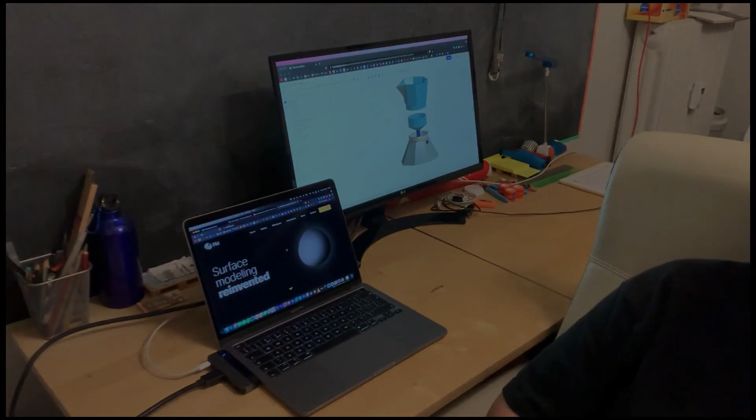To make the stovetop coffee maker, I started by designing its base. First, I designed the simple shape, and then I added, using the helix feature, the screw part which connects with the part I'll show you next.

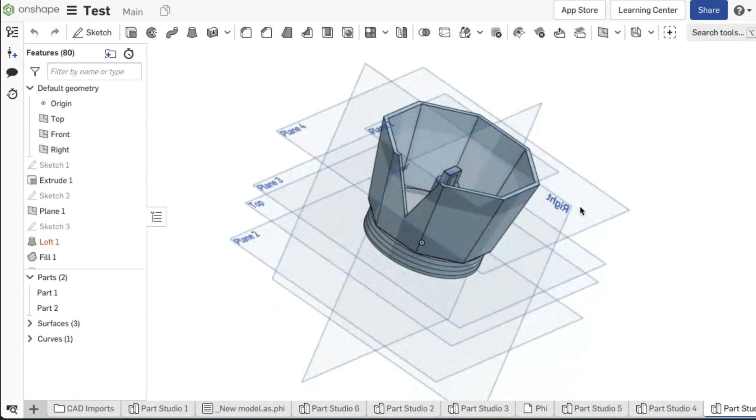This is the middle part of the coffee maker, which connects with the lower part using the helix tool again, but this time engraving it.

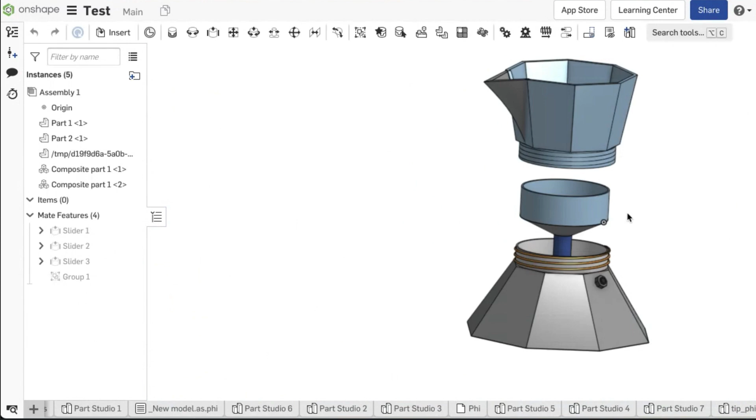Then I designed the part that goes in the lower part, which acts as a filter, for which I used the circular pattern tool to make all of these holes. And lastly, I assembled all of the parts together.

The next part is the tip of the stovetop coffee maker, which I designed using the Phi software. As you can see here, the curve where the two faces meet. And the handle was also designed with Phi, as you will see later. We designed the spout and the handle on Phi and everything else on Onshape.

To create the spout, we have already designed the rest of the top container on Onshape, so we now import it into Phi as reference. Then we select the faces where the spout should stand and convert them to Phi faces.

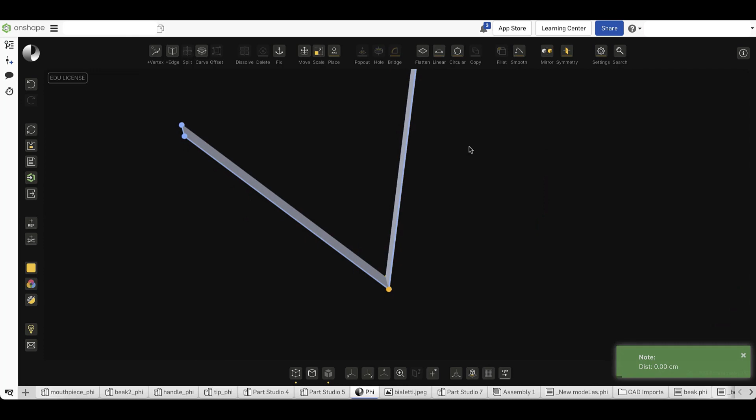After we hide the reference, we stitch the faces at their common edge to merge them into a single zero thickness part. We pop out both faces to give a thickness, and then we select this middle edge and pull it upwards and outwards to give the spout its basic shape.

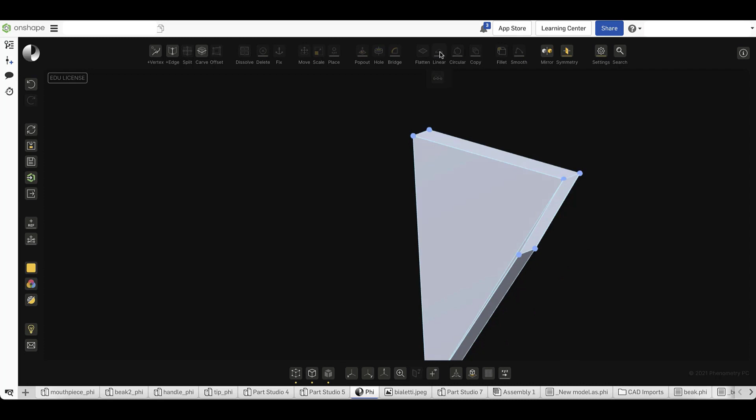We delete these unnecessary elements and make everything straight. We then curve the front edges for the coffee to flow nicely. Note that the hidden edge mode is being used now.

And then to curve the top, we add 4 vertices and pull them upwards. This is roughly the shape we want. So we check it on the reference model and we send it to Onshape.

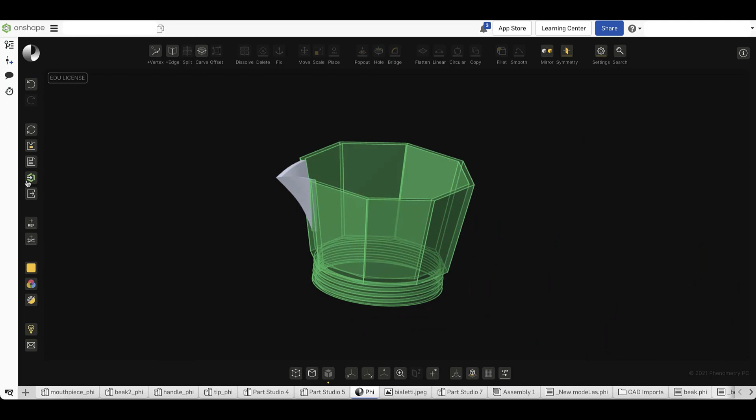It's going to appear in a new Part Studio tab like this. But since it's in fact a piece of the container, we bring them together in the same Part Studio and use a Boolean union operation to make them a single body.

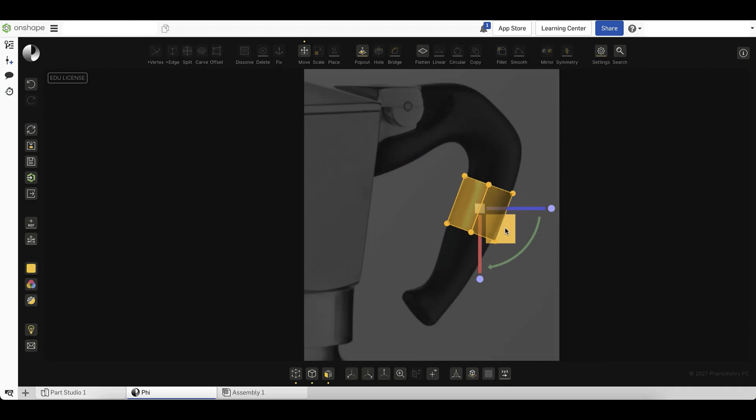Now, in order to design the handle, we start with a cylinder which we gradually lengthen and shape. At this stage, we are actually using the pop-out command over and over, and we manipulate the new faces created so that the shape is roughly defined.

Then we adjust the edges in detail and smoothen them. Smoothening is often combined with fixing. You can tell an element is fixed from its gray color.

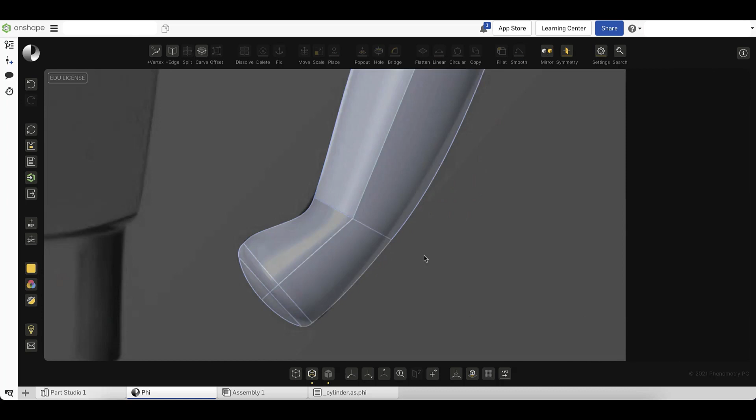As you see in the recording, before applying smoothness, we always fix any faces, edges or vertices that we need to preserve intact through the smoothening operation. This way, smoothening is applied as we want it.

Eventually, we reach the top end of the handle and need to bear in mind the assembly of the handle to the rest of the coffee maker.

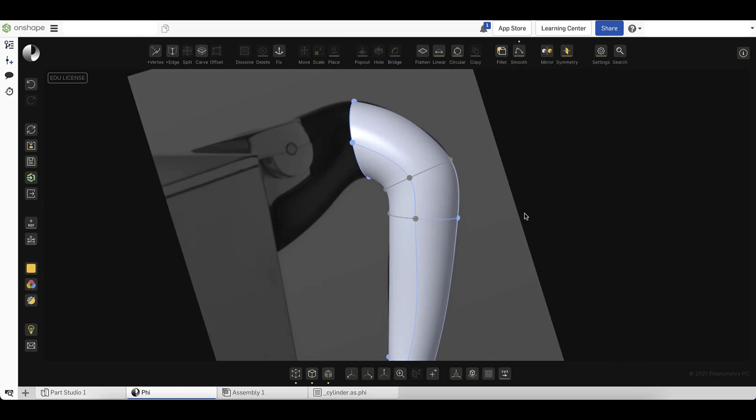As shown in the reference picture, there should be a socket-like protrusion where the handle will be inserted and fastened. Let's assume that this socket must necessarily have a rectangular shape with corners, as shown here.

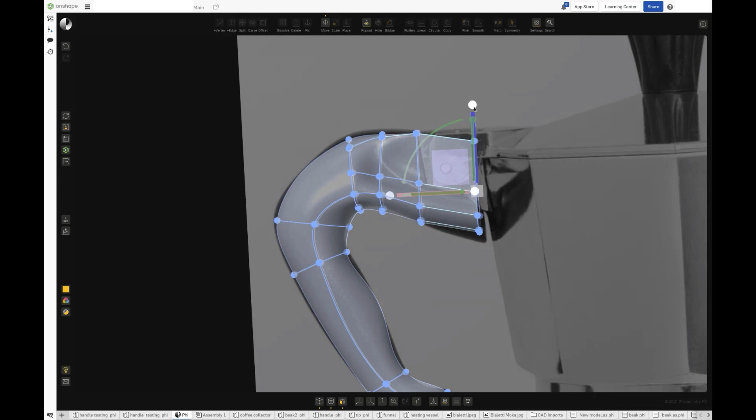We therefore want to design the handle for a smooth transition from freeform to rectangular. So, as you see, we have added some more edges along the last sections to create sharp corners.

To take care of some details, we import the coffee collector itself as a reference model and we work on the handle some more. When we are satisfied with the result, we can send the body over to Onshape to continue there.

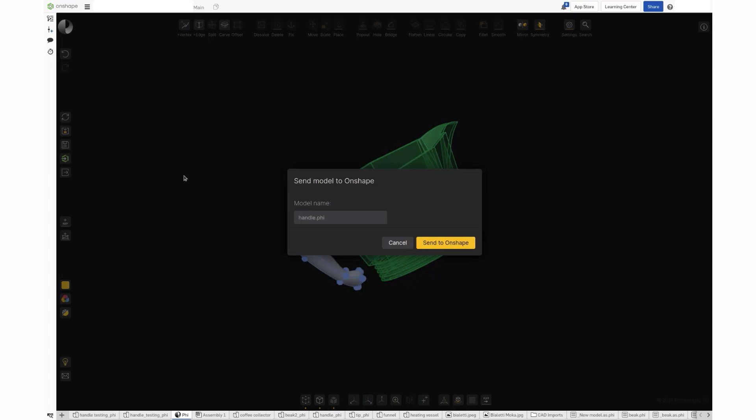So, after we have sent our model to Part Studio, we bring in the coffee collector and use it as the tool of a Boolean subtract operation. This means that material will be removed from the handle to make room for the socket walls.

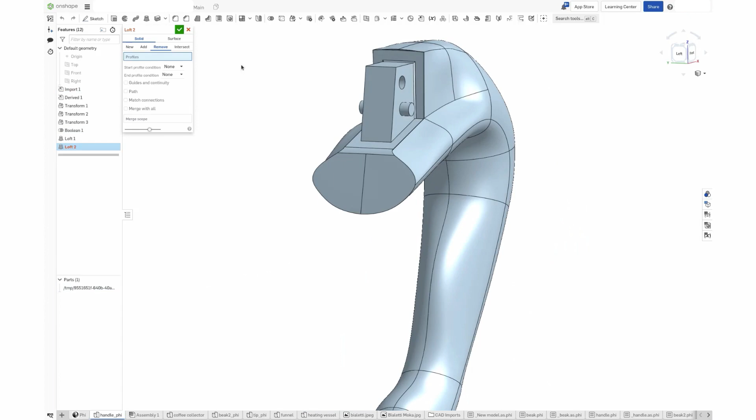Lastly, we loft off the leftovers, which will also create the holes for the fastening, and our handle is ready to be assembled.